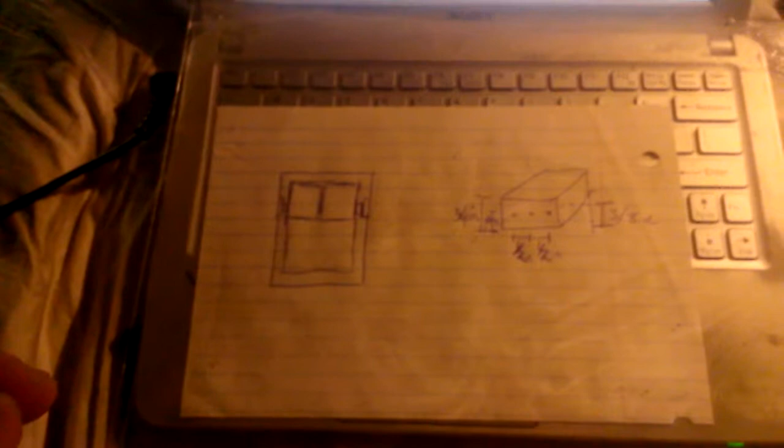Okay, so Def here, and here is a project that I'm working on, which is, well, yeah, that's the blueprint of the project I'm working on. What this is going to be is a miniature test robot for a robotic lawnmower.

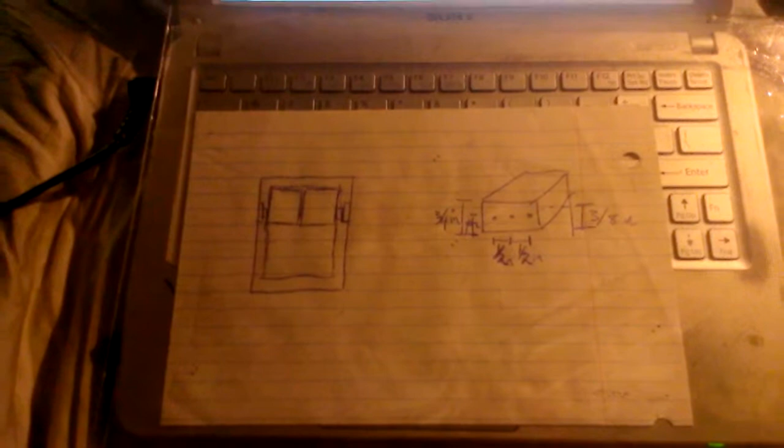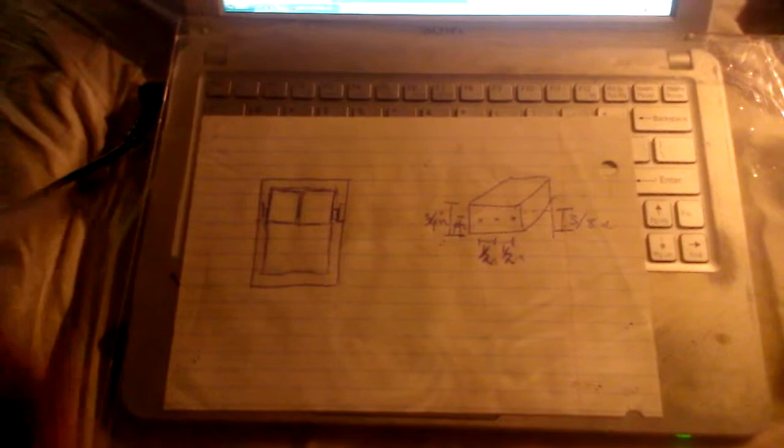A friend from school approached me and asked me if I could build him a frame for his test robot lawnmower, because he's building a small one before he scales it up. So I said yes, and so that's what I'm going to be doing. So that is the basic blueprint that I drew out, but what it's really going to look like is this. It's gonna be a box, which will look like this.

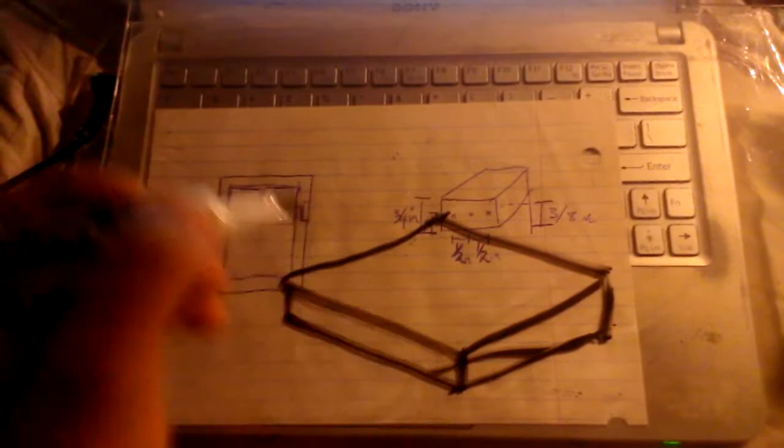This entire frame is gonna be made out of angle steel or angle iron that I get from Home Depot, and I'm gonna do all the welding, the cutting, and stuff like that. So that's basically what it's going to look like.

The frame's going to still be a box, and then electronics go up here, a chip, motherboard, whatever you want to call that. And then there's going to be two wheels here, and then a wheel here, and then a little outrigger wheel out here that's going to be down there. Then I'm going to add a little shelf down here for storage of stuff and whatnot. So that's what it's gonna look like basically.

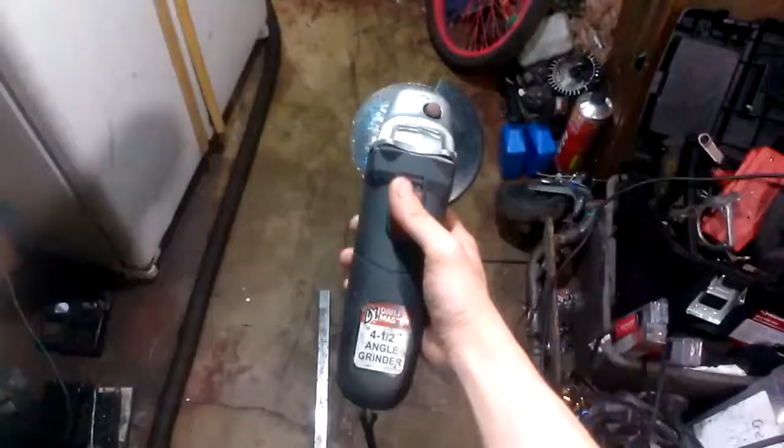So there's no point in me sitting here and talking about it, so let's move down to my workshop and start working on it. Main thing at the moment that I need is this angle grinder, so let's get to cutting.

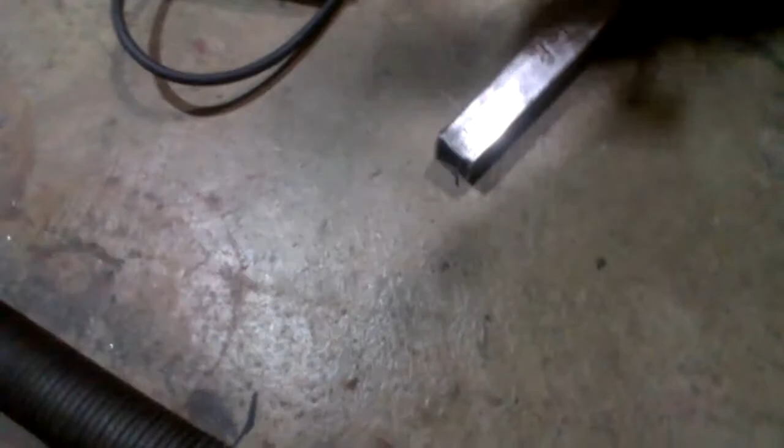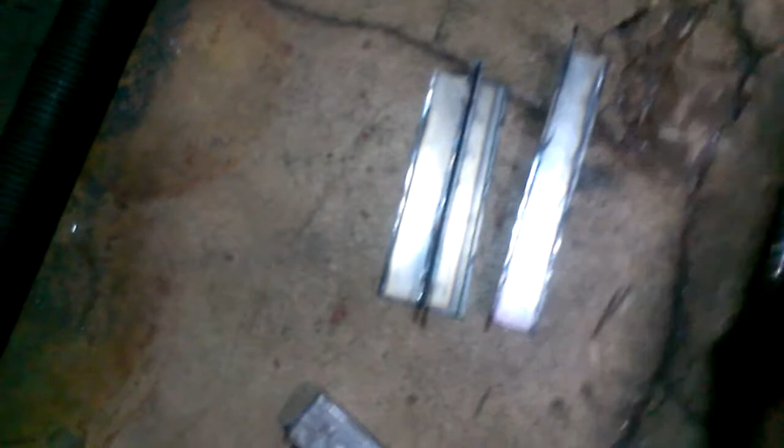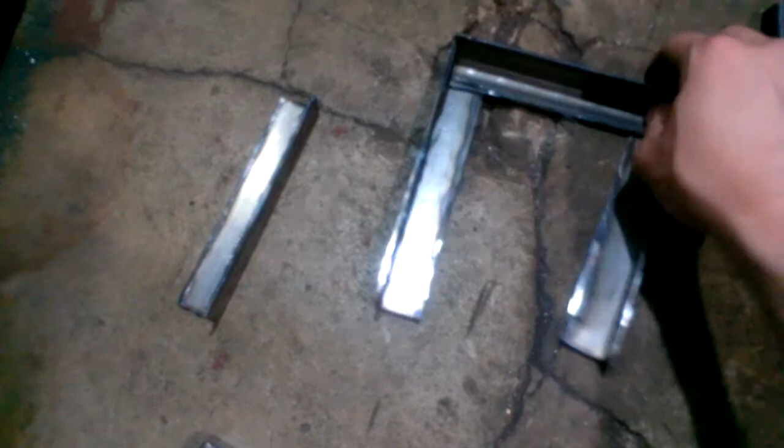So, I have the basic pieces of the frame right now, so it's going to go like this. Here are the two long pieces. They're going to sit like that. Yeah, it's going to sit like that. Then these are going to go across like so. Yeah, that's still freaking hot. So, yeah, it's going to go across like that.

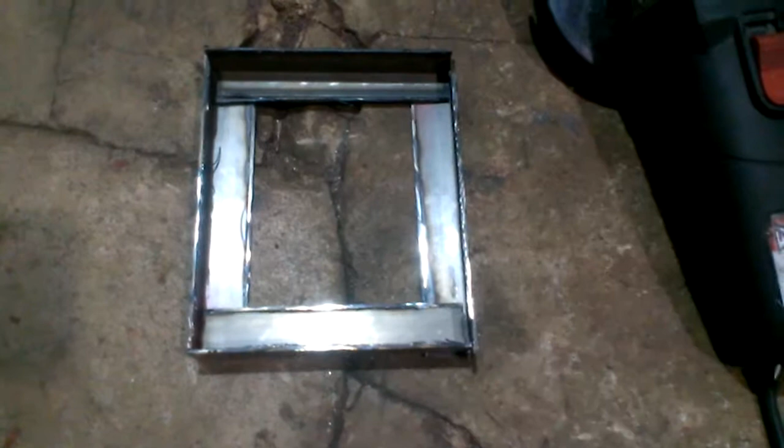And like that. But yeah, I'm actually going to put it together straight. It's basically like that, but flipped around. And right now that's a rough mock-up of what it's going to be. So, yeah, it's time for me to do more grinding and cutting and drilling actually, and go into the welding. So I will get to that when I get to that. So, I'm just doing some drilling now.

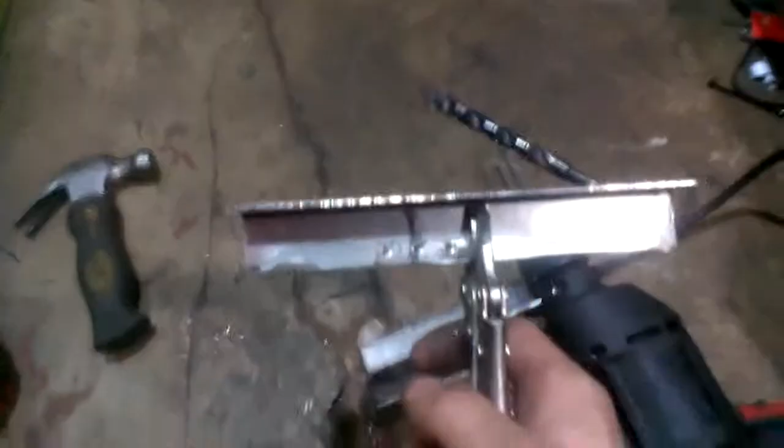So, this particular robot frame that I'm building uses most of the components from the Vex robot, I believe it's called. So, the previous one was like a 4-wheel drive, independent wheel, all that fancy gobbledygook and whatever. So this design, we're gonna go with a 2-wheel drive system, one on each side. As you can see, this is the two sides.

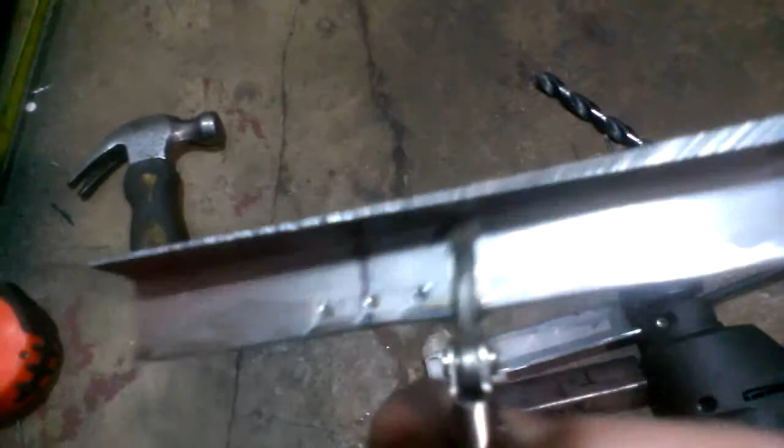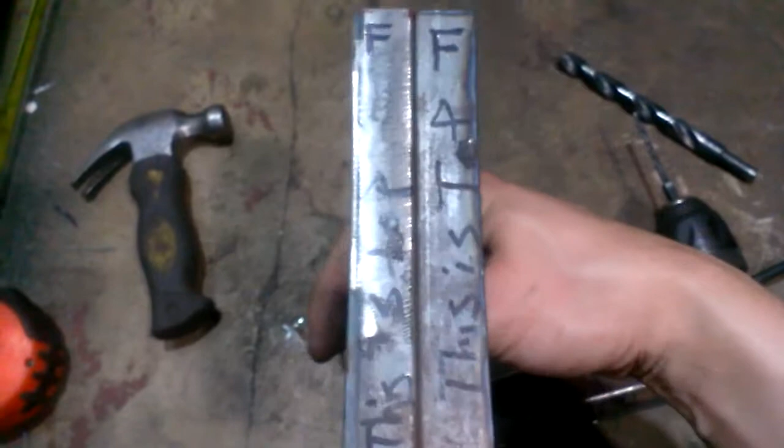But yeah, I drilled some holes so it's off the centroid of this rectangle. Some statics there, but yeah, it's off centroid because this is a 6-inch long piece of steel. I have it off 2 inches from the left, so that is going to be the hole where the axle for the wheel is going to be at, and then these two holes are the mounts for the axle, and that's just going to go through the side, which, yeah, this is one side, this is the inner side here, and the two sides that are clamped together, that's going to be the outers. But yeah, that's what that is right here.

But this is going to hold the bearing system, so I got to make another set that's going to bolt in here somewhere. That's going to be for the actual motor. So I'm going to work on that also.

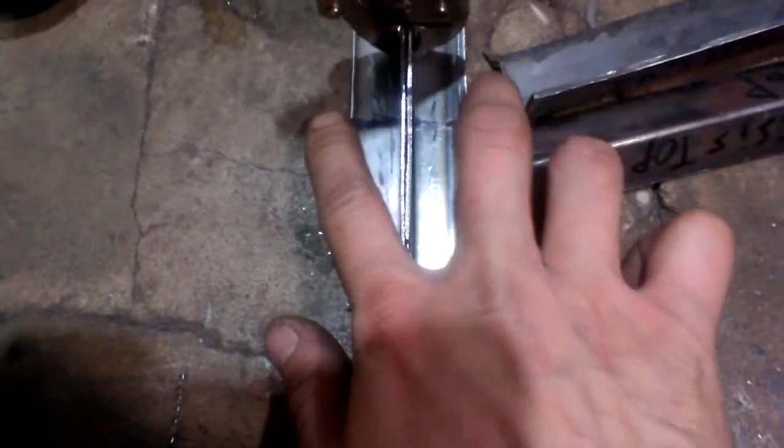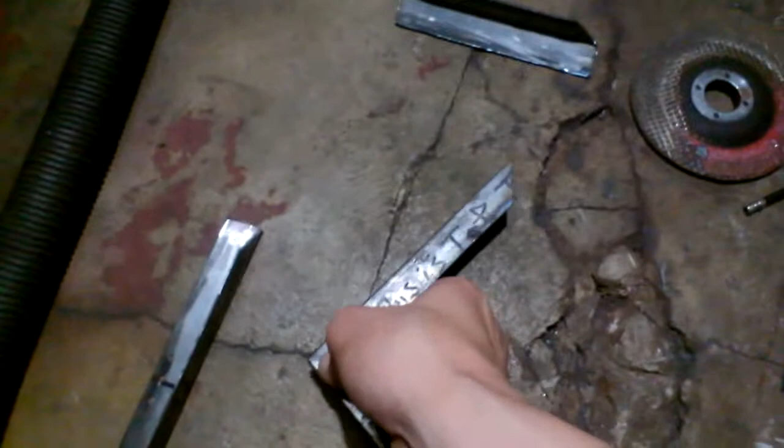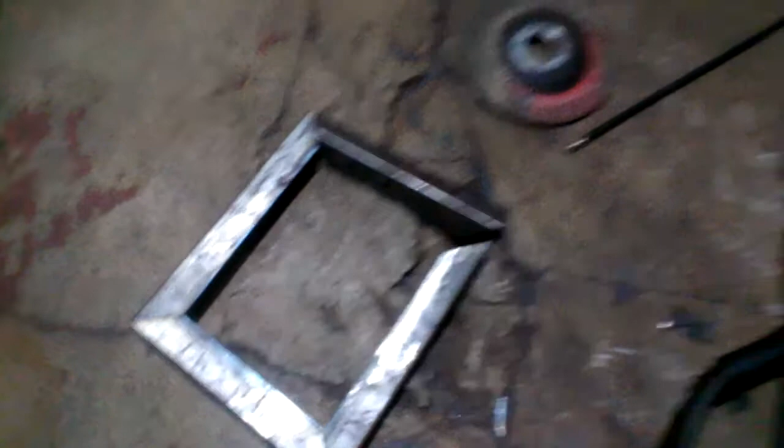So I got the corners knocked off of it, as you can see, which I'm just cleaning up and just putting a 45 on them so I can actually weld together an entire frame like so. But that's what I'm doing at the moment, and yeah, I'm going to weld it all up now with my arc welder.

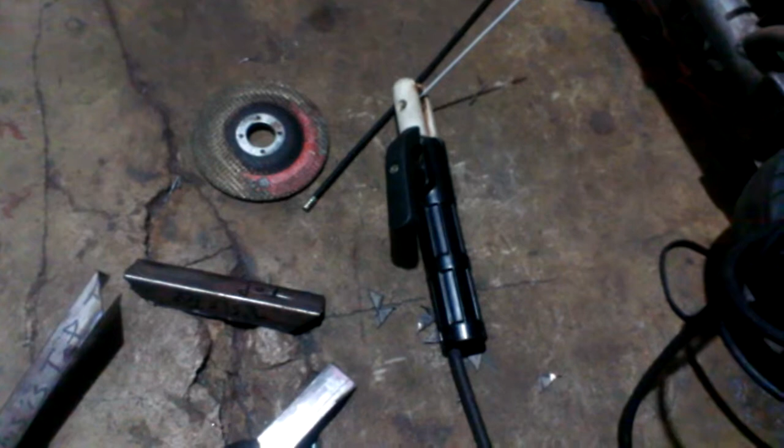I'm using 16th inch rod, and the rod is a 6011. I wish I had gone with a 7014. I don't know why. I ran them quite successfully and good, but I thought I'd switch down to a 6011 this time around, see how they run, and I kind of don't like it. But yeah, I'll weld this up and we'll see how that goes.

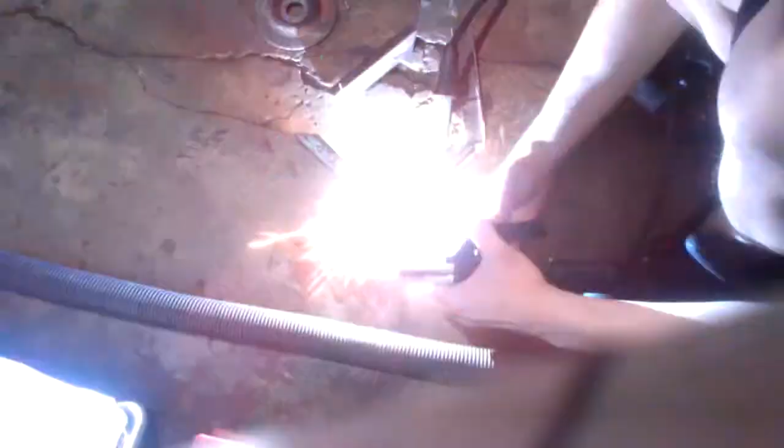So, did some tack welding, and all the corners are in place. See? Yeah. All the corners are tacked in, so it's actually staying together. And it's square also, as you can see.

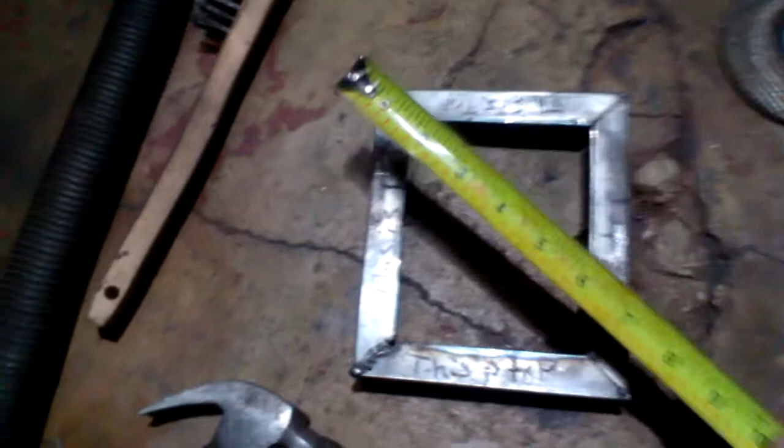I'm about 8.5 there. And let's go this diagonal, which is about 8.5. Yeah, so it's pretty square for what it is. It's just, I did horrible fitment on this. It's really hard when you don't have the correct tools, but you make do with what you have.

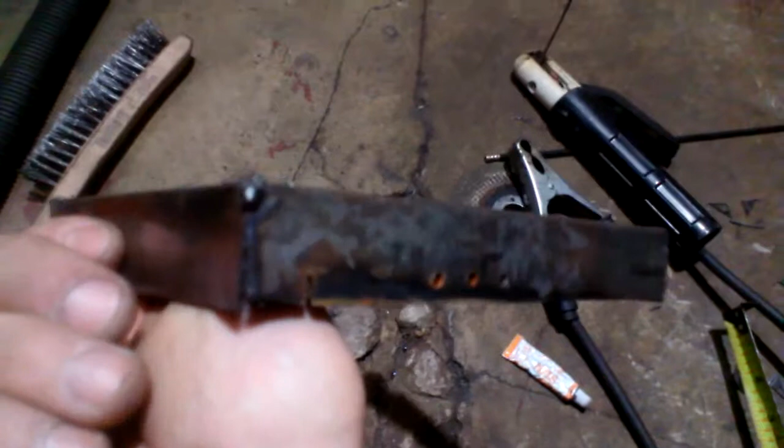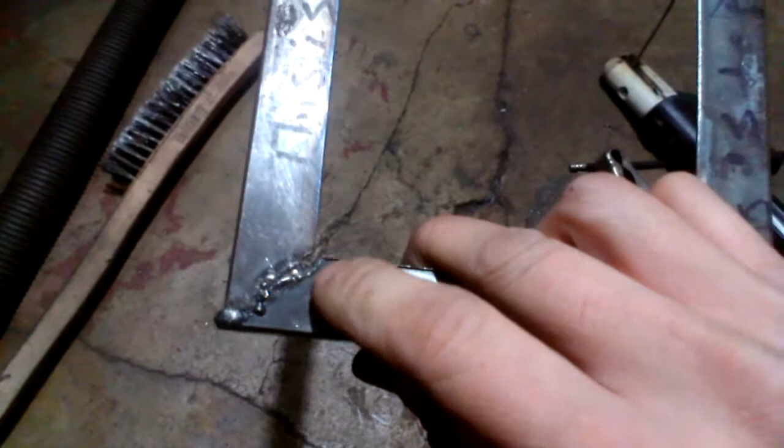Because all I had to work with was an angle grinder and a drill, but all the other holes are in place. Yeah, I just gotta weld everything together. I'm gonna fillet, I think it's fillet weld these corners, and I'm gonna try to fill these in also.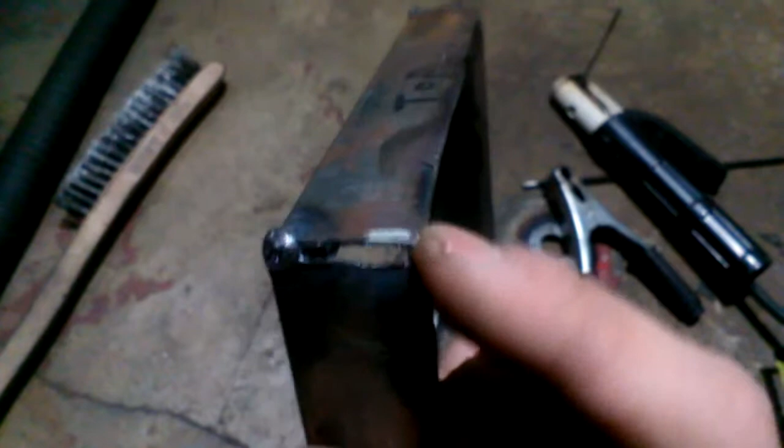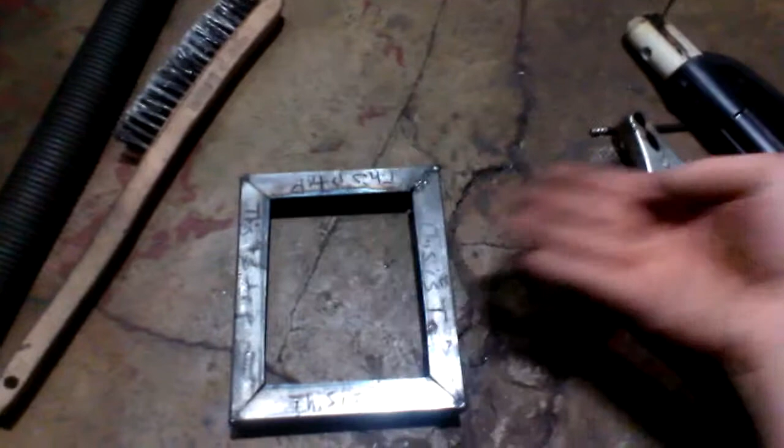Honestly, I might just put a tack down in the corners for all these, and that'll probably hold it well enough, because I got the tops in, and I'm gonna put a whole plexiglass or Lexan sheet under it to support everything also. So, yeah.

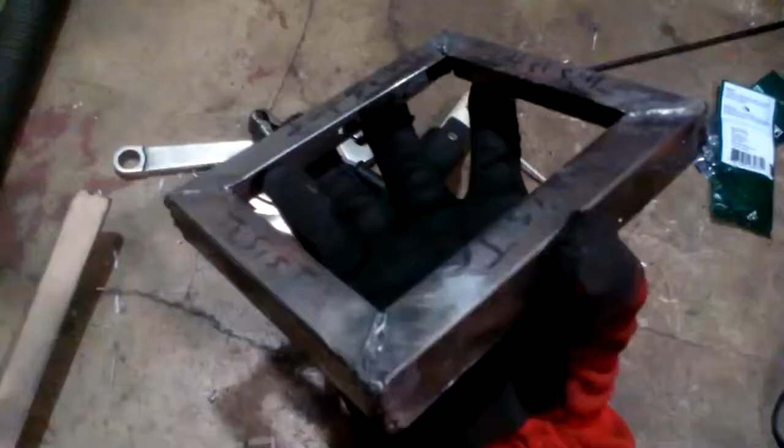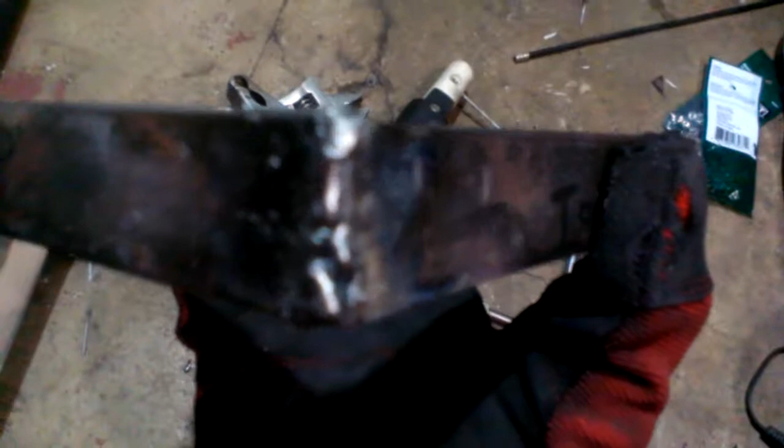So, here it is. It's welded together. Some of the corners came out really nice because I had good fitment, but some other corners, I had to actually fill in the gaps, which were horrendous for a 1/16-inch rod. But you can see some of them are rather decent and some aren't so great. But the whole thing's staying together, it withstands the drop test.

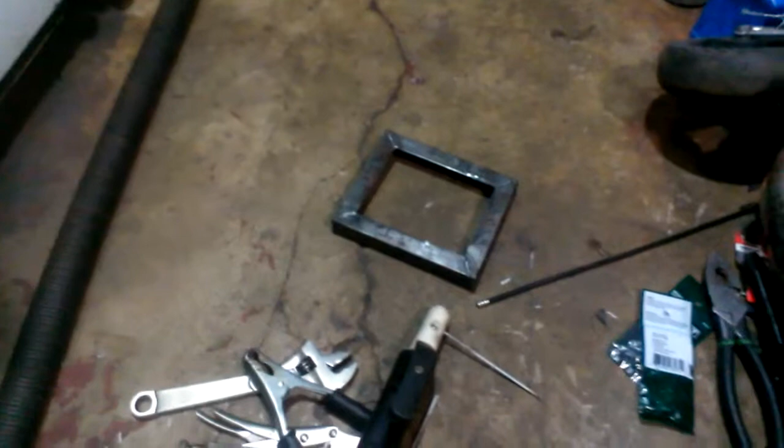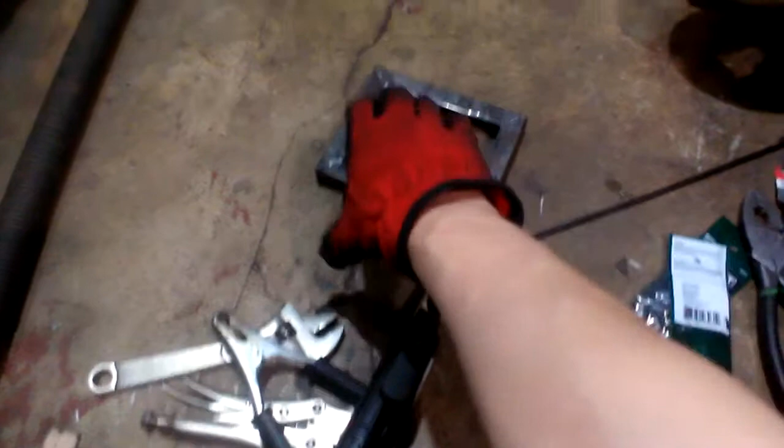So now to add the Lexan top on there, or whatever you want to call that, and make some mounts for it, and an outrigger out front for that front wheel out here, because the two wheels can be side by side here. So yeah.

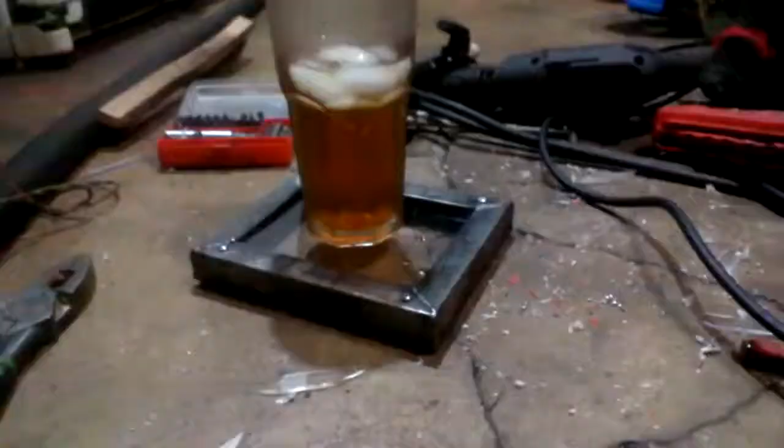Yeah, I got a miniature coffee table. No, just kidding.

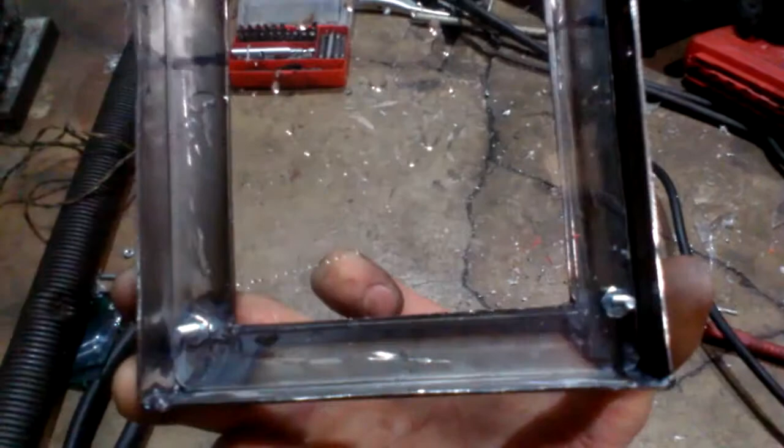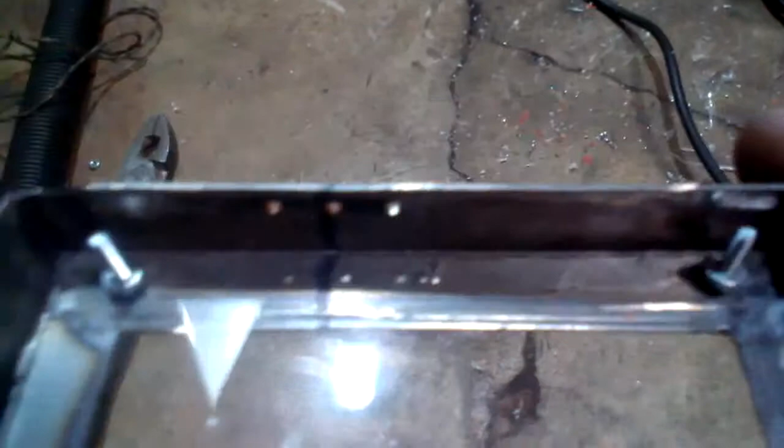As you can see, I have the Lexan or plexiglass platform on here, which is bolted in. I got water on it, but it's bolted in, and that is what all electronics are going to sit on. And I still got to do the mounting holes on the inboard of here, which I got to measure and cut and whatnot. So I'm going to work on that. But yeah, it's coming together.

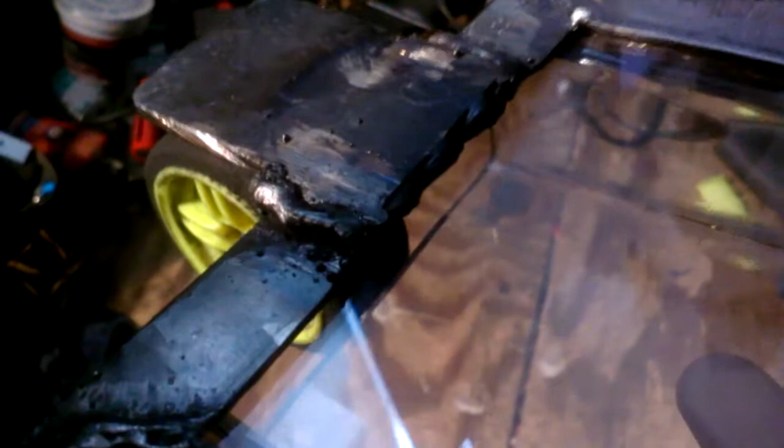So here's the complete robot frame. As you can see, I put the front outrigger on it, a single front wheel. I didn't do so great on the welding, as you can see there. But it's holding. See, it's holding. Yeah, that's some gorilla welds, but I'm pretty sure those welds will work for what we're using it for, which is being a test robot, a miniature one.

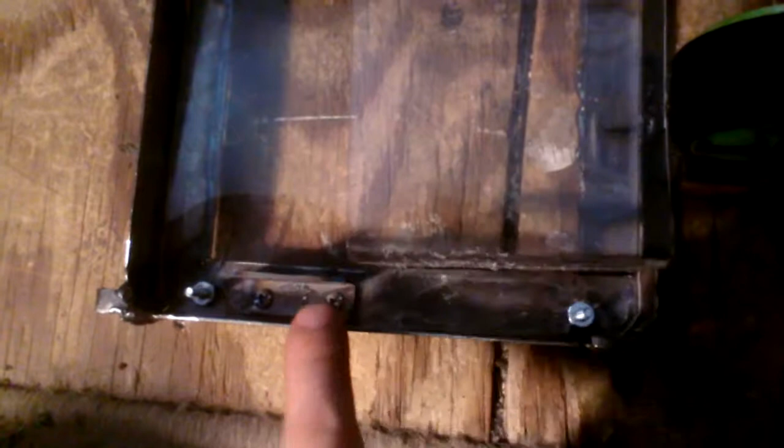You can see the underside of it. I put the mounts for the servo motors in here, and there's spacing for the bearing system, which is gonna sit right in there between the mount for the servo and the frame.

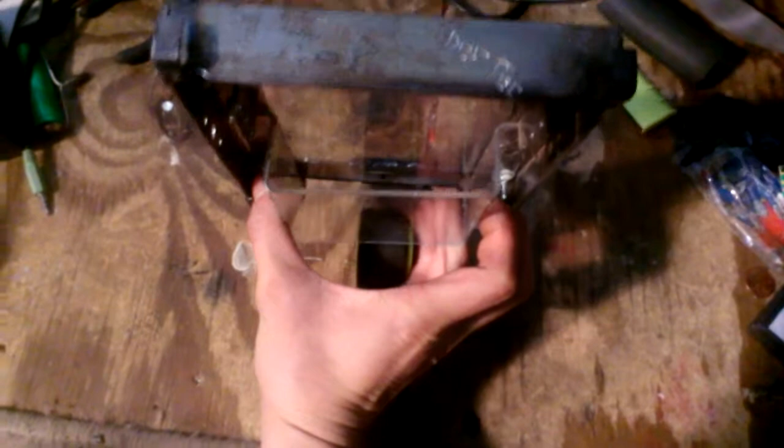And here I added a shelf too, if you can see that. That's a shelf for other electronics. Well, the top electronics are going to sit on it, but I added this bottom shelf down here to hold other stuff like batteries and whatnot.

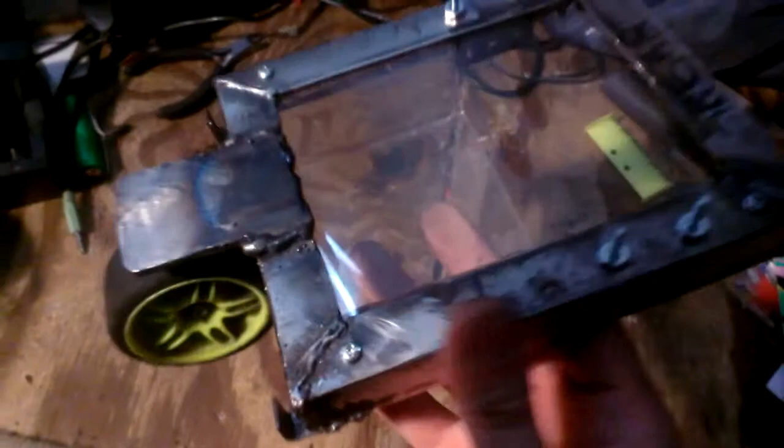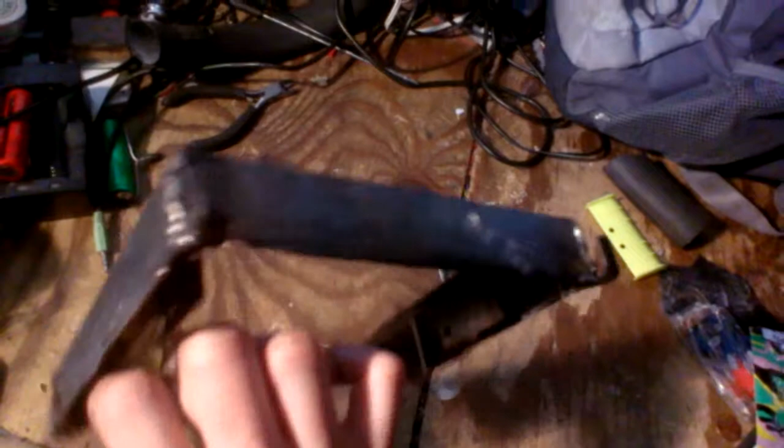Oh well, yeah, this too. I added these little hooks on all four corners of it. It's gonna have a box that goes over it for image tracking, and we needed a way to actually hold that box in place. So yeah.

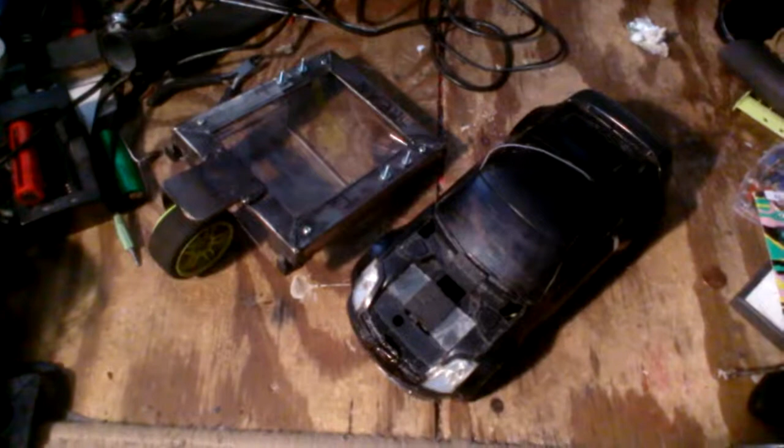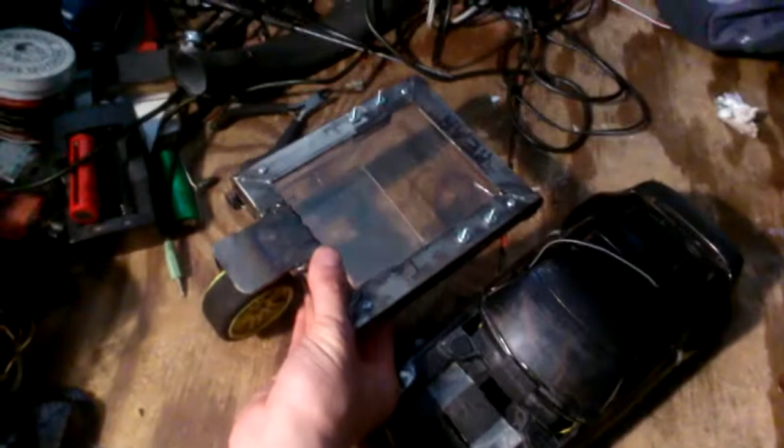It's done. So here's a side-by-side comparison of this robot frame next to a 1/16 scale RC car, and you can see they're pretty similar in size. One thing, this is made out of steel actually, and this will probably take a beating. And this thing, it's actually falling apart from all the times I've crashed it.

So that's pretty much it for now. It's time to bring this to my friend and have him mount all the electronics on it and see how it works. So yeah, that's it.